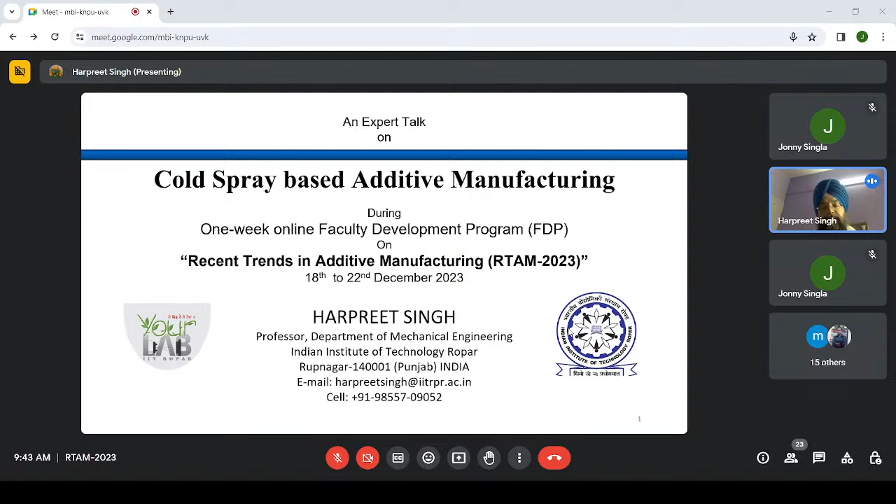let me start. Now, this is the first slide, which is about my group. My group has several students, as in the introduction. Almost 20 to 23 students have already passed their PhD from this group, in our lab, and several more are doing their research work. So why I'm here is basically due to my research scholars, my students, who have been helping me to understand this

to greater depth, because I completed my PhD in 2005, and after that my role is more like a manager, to manage funding and kind of mentor the students. But the actual work is done by these PhD students, master students, and so on. So I owe all this credit to them, my students.

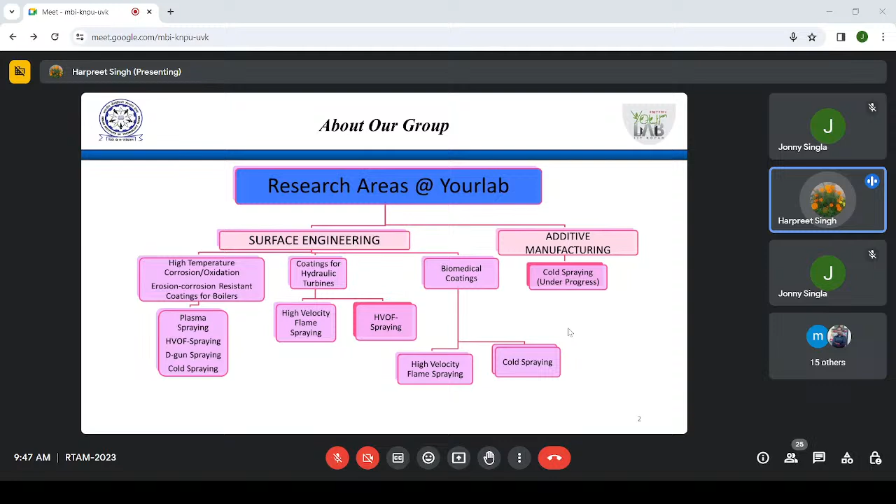Now, another aspect which we have started very recently, I will say, is additive manufacturing. Now, again, here our emphasis is not on selective laser sintering or melting or those kinds of processes. Rather, as I told you earlier, we are trying to explore cold spray capabilities for additive manufacturing. Why? We'll understand why it is an attractive option to us as we progress through this. This is a little bit about what kind of research we are doing in our lab.

Now, since I use this word thermal spray, what is thermal spray basically? Thermal spray is basically a process to develop coatings, right? So we want to develop some coatings on some substrates. What will be the feedstock? Feedstock could be powder, or it could be wire also. Now the idea here is that we melt the powder. Typically, we used to melt the powder or the wire, and then propel it with certain velocity towards the substrate. Substrate is the substance where we want to develop the coating.

So suppose I want to develop a coating on this surface. I will heat the materials or sometimes melt the materials. Then those materials will be pushed with high velocity towards the substrate, where they will stick on the surface. Now, this is basically a TV process. Thermal spray coating is basically a TV process, meaning a temperature and velocity process. So we heat the materials, we propel them, meaning we give them some velocity, and then we allow them to solidify very quickly on the surface, which we call the substrate.

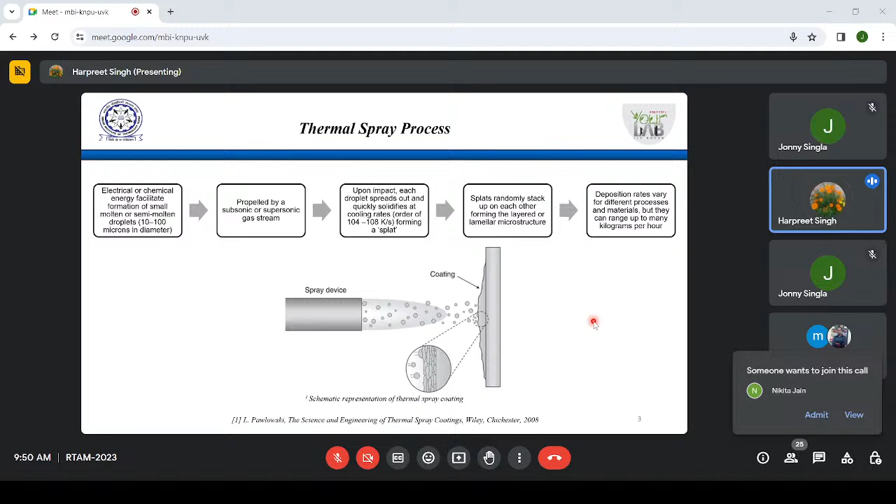So from there he got this idea, he started his work, and he developed some of these initial variants of thermal spray, which were more electric energy based, and then later on flame also came into the picture. So see, when I say temperature, how will it come? It can come from some fuel, or maybe from electric energy and so on. So that is where people started using these options. Wherever we were using flame, we call it flame spraying based processes. Wherever we are using the electric arc, these are basically based on electric energy, so we use the word arc and so on.

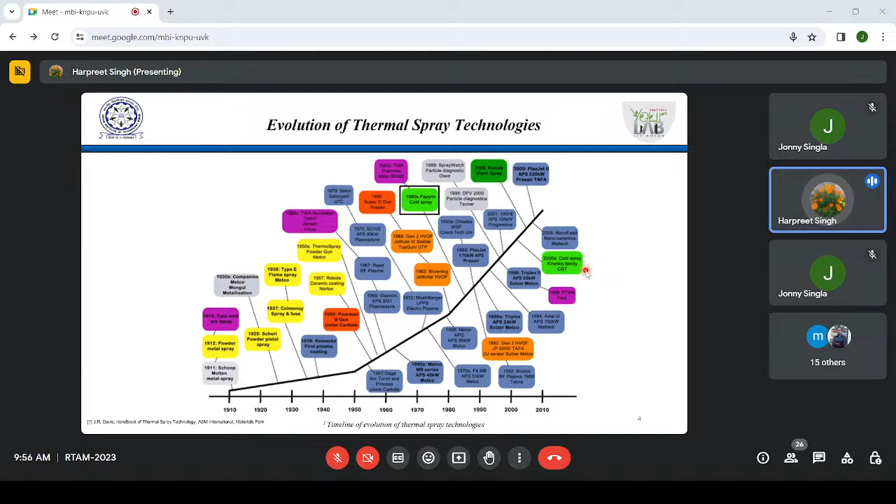So as I told you, we do not appreciate high temperature much in any process, because this leads to phase transformations or material oxidation, right? The most frequently used feedstock in thermal spray is powder, and powders are very active, so they get degraded when temperatures are high. That is something we want to avoid. So that's why we started thinking of lowering the process temperatures, right?

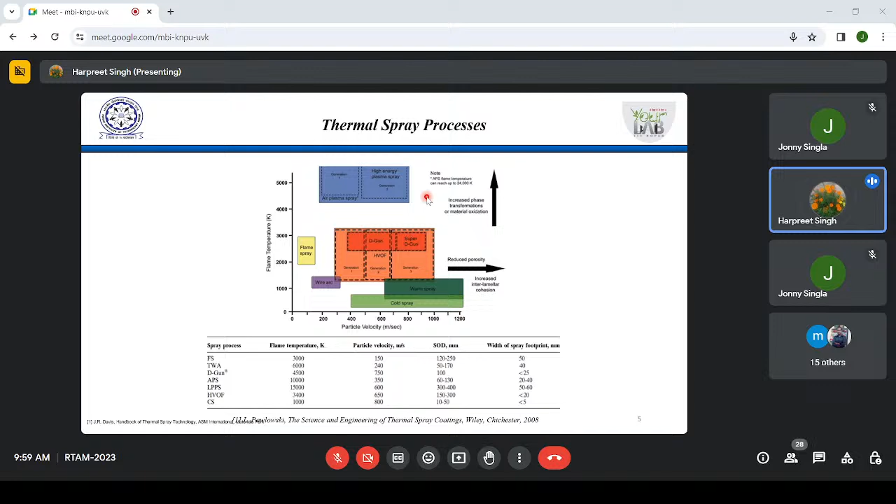Because if you see plasma or flame spray for that matter, after a typical thickness you will not be able to retain further material on those coatings, right? And you become restricted in terms of the thickness to be achieved. Basically, it is due to the inter-lamellar cohesion differential.

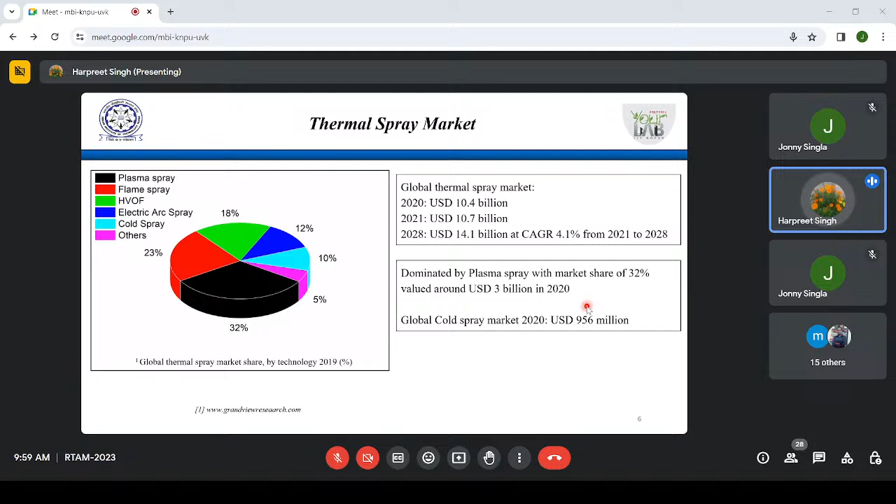So thermal spray in itself is a good market. I would say it is now a fairly popular market. You can see here plasma and all these generations of thermal spray are getting a good amount of market, and of course cold spray is picking up. Here it is 10% of the global market. These figures show that there is a demand for thermal spray technologies. Plasma spray is still enjoying a very good market share, but cold spray also has its own niche market.

So it is coming up in transportation and so on. Transportation is the biggest lever for cold spray, and by transportation I mean the aerospace and automobile sectors. There, cold spray is getting much recognition mainly because of its solid state nature, meaning the process temperature is very low and the quality of the deposits is very high. So the cold spray market definitely is picking up.

And if you see any thermal spray conference now, a lot of research emphasis is on cold spray these days, because people see its advantages in two domains. One is surface engineering, and another is additive manufacturing.

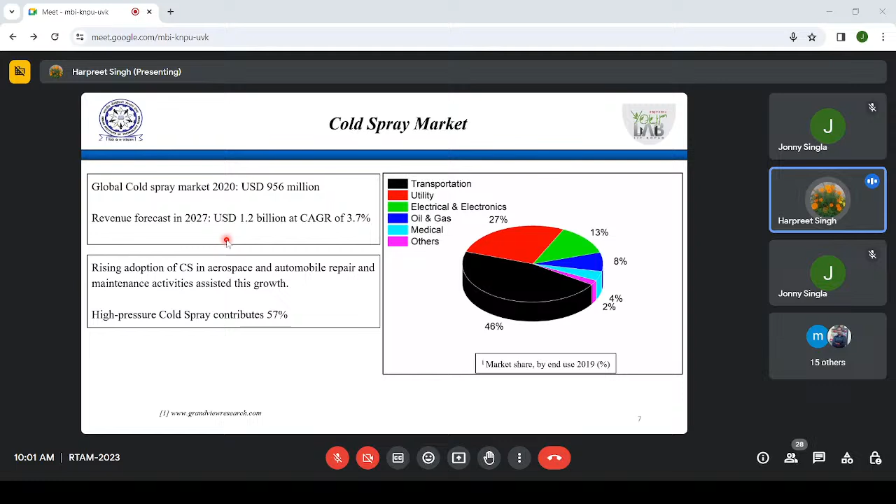Now this brings us to the cold spray process. Let us try to understand it. As I told you, we are majorly dependent upon the velocity, right? Here the velocities are very high, typically supersonic, meaning the Mach number is more than one. We are reaching Mach number 2, 3, and so on.

Now, how to do it actually? Getting a supersonic jet is not an easy job. That is done with the help of supersonic nozzles. Those who are good in thermodynamics would know that supersonic nozzles have converging and diverging sections, right?

So we have the throat here and we have this converging and diverging section. Now, the role of this nozzle is basically to achieve a supersonic jet of a gas. So we are using nitrogen, or in initial variants they were using air itself, and then helium.

So the three options are frequently used, but air is used for low pressure cold spray systems. When I say low pressure, I mean systems with less than 10 bar pressure. But if we have high pressure systems, we have to go with nitrogen. And if you want to have very high purity coating, then helium is a good choice. But everything comes with some price, and we have to have a kind of selection manual to make such decisions.

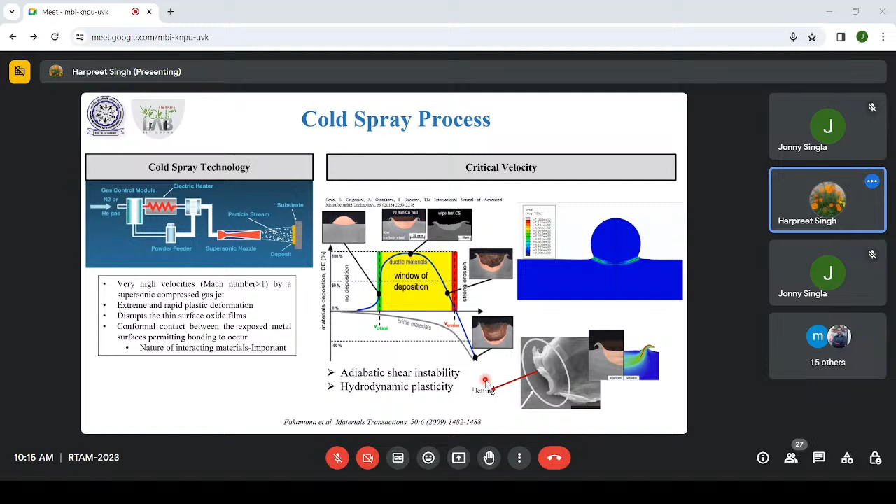Now, as in the introduction, we said that we have set up this facility at IIT Ropar also - a cold spray facility. We have this system from Plasma Giken, and this is very high pressure, I would say.

This can go up to 50 bar pressure and 1000 degrees Celsius temperature.

So since this system is creating a supersonic jet, we can partly see this gun actually. I'm sorry, I don't have the full figure of the system, but anyway, this is the gun, what we call the cold spray system.

Here we have this nozzle outlet. Now particles will be introduced from here, and gas and everything will come from outside. Now everything is done in an acoustic chamber.

Why? We can well imagine that we have this supersonic jet of gas which will create a lot of noise. So we have this acoustic chamber and so on. Here we fix the part, the sample on which we want to develop the coating.

And let me show you this video. You will see material coming out from this nozzle. The point here is that in cold spray you don't even see this jet actually, because there's nothing burning, there's no flame per se.

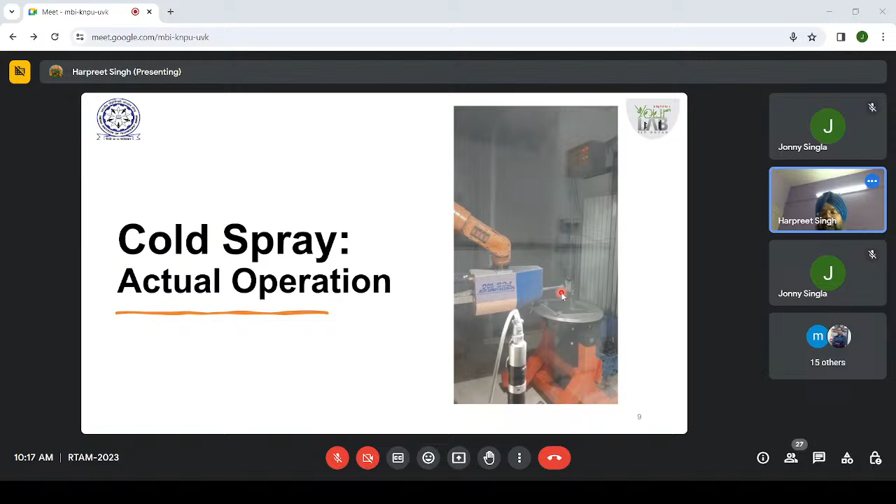So you can move the gun, and we are getting the thing on. You can see the stream coming out of it.

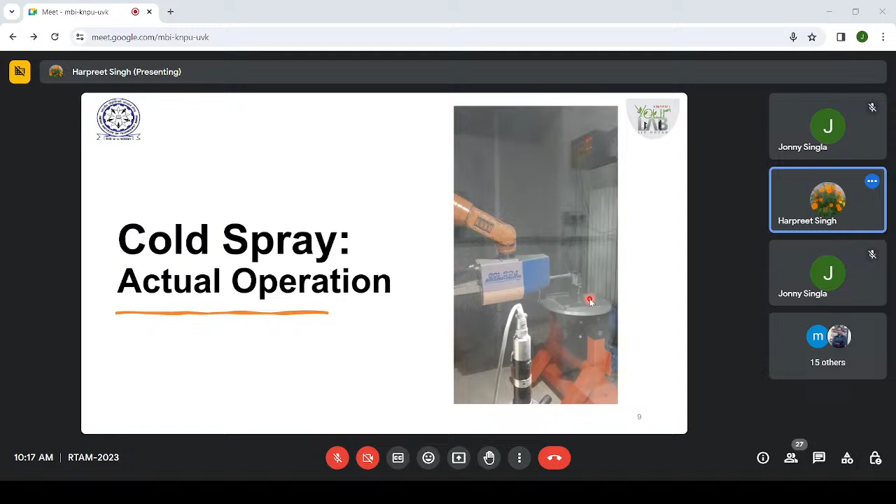You can see the deposition is right on the target.

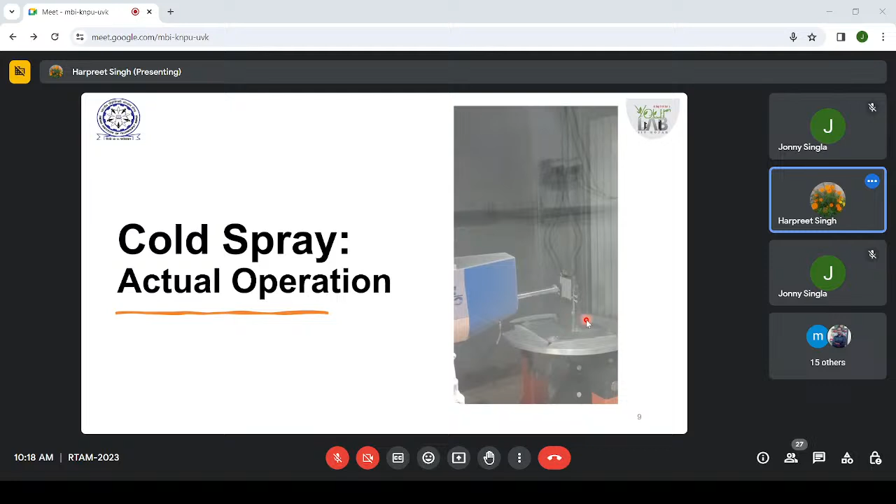Okay, so now, from a scientific point of view, this particle impact basically will depend upon particle velocity and particle temperature.

Now, how is particle velocity controlled in cold spray? That will depend upon the stagnation pressure - meaning the temperature and pressure at which you are giving the gas to the nozzle.

Process temperature also matters, because as I told you, lighter the gas, more will be the particle velocity.

I mean, more the temperature, more will be the velocity of the gas, and hence the particle velocity. And the nozzle dimensions, type of carrier gas - helium, nitrogen - among these, you can get very high velocities through helium.

Nitrogen is kind of a trade-off between air and helium. The problem with helium is, although you will get very high quality coatings, it's very costly.

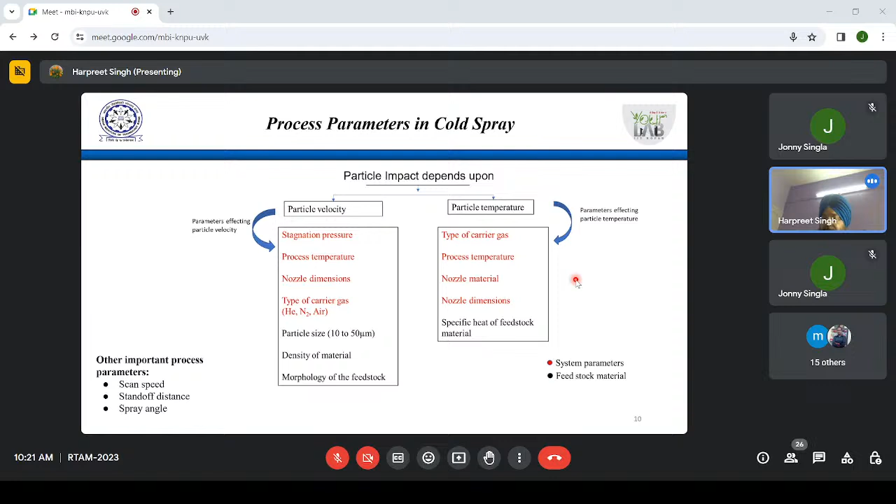So these are all process parameters which one should look into while developing the coating.

Now the question is, why is cold spray being used or becoming popular for surface engineering as well as additive manufacturing.

So one is that no melting of powder takes place here, right? That means the chances of oxide formation, etc. will be reduced, especially when we have low melting temperature materials like aluminum, etc. So this gives us an added advantage, right?

And plastically deforming the feedstock powder will improve the mechanical properties. It has been seen that since you are doing severe plastic deformation of the particles, their grain size also improves, in the sense that it becomes refined and you get very good mechanical properties in the deposits, which is another very attractive point.

Coating thickness, yes, as I told you, we have very good adhesion or cohesive strength between the layers. So you can use it for additive manufacturing as well, and as well repair. Repair is also kind of a domain in manufacturing itself, done just like as we do additive manufacturing, right? So repair means typically here again we need to have some kind of thick deposits or deposits of high quality and so on. I'll show you some examples.

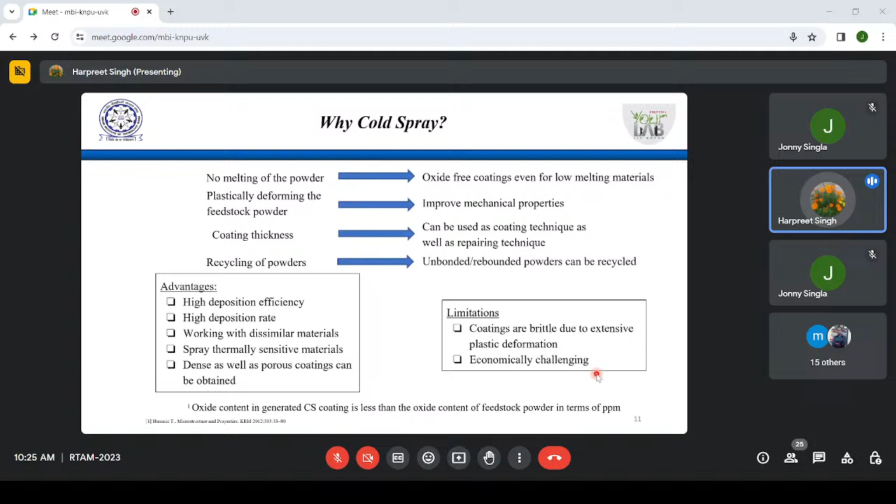Limitations are basically two. Coatings are brittle due to extensive plastic deformation, right? So they become very brittle. That means you have to sometimes do some kind of post treatment to remove that brittleness, right? And economically, it is challenging, of course, because of the higher volume usage of the process gas. For example, nitrogen will be used in our system, right? So that becomes challenging. Of course, people are trying to recycle this gas also. Probably in the future we'll get some good economics in this aspect also. But this brittleness thing, in certain applications, it's fine to have brittle, no problem. But in certain other cases, you have to have some kind of heat treatment to reduce this brittleness in the deposits.

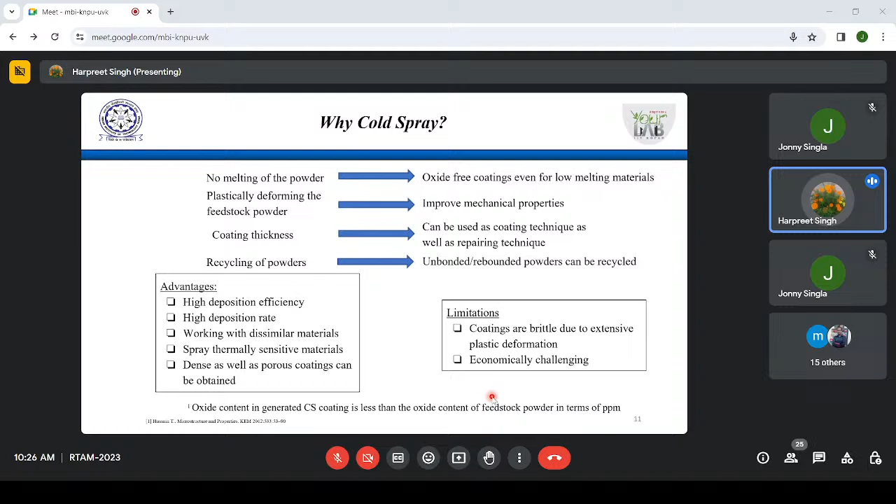Here's another very interesting observation: the oxide content in the generated cold spray coatings is less than the oxide content of the feed powder in terms of ppm. What does it mean? Whenever you get some feedstock powder, it will have some kind of oxide content, because these powders are very active, so you get some kind of oxide layer on the powder particles. Now what has been seen in the cold spray deposits is that oxide content has even reduced, which is interesting, right? Instead of having oxidation, we are getting reduced oxidation. This observation basically comes from the fact that when particles are going, suppose there is a particle which has some oxide layer. Oxide layer is usually very brittle, so as soon as it strikes the surface, that oxide layer disrupts, goes away, flakes away, and you get adhesion. So that is something interesting which has been seen in some of the studies.

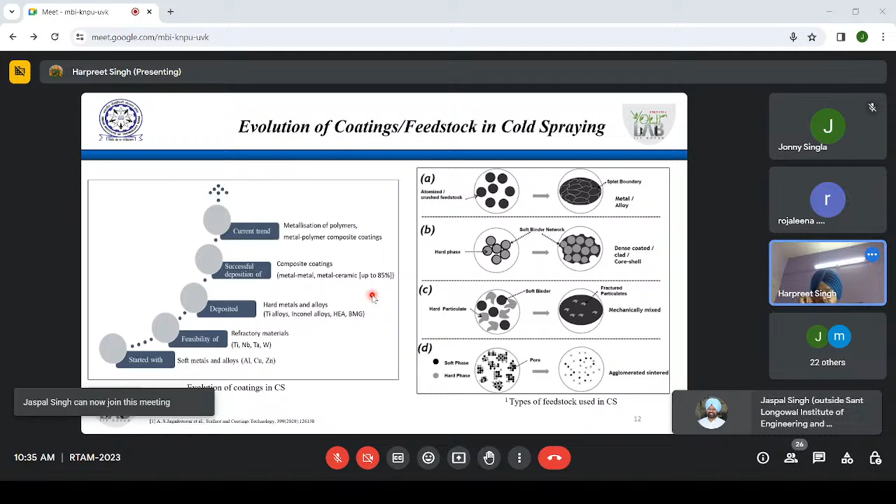Well, as I told you, if there are some challenges in terms of getting the desired properties, people have done some interesting work in terms of post processing of these deposits also. One approach would be that we go with heat treatment, right? So heat treatment, we all know that it can mitigate the porosity, it can improve the intersplat bonding, just like in your sintering. This, for example, is an as-coated substrate, right? So this is the coating.

In the coating, you will see very clearly the splat boundaries. But once you heat treat, these splat boundaries can be merged and you can get better intersplat bonding, right? So this approach is being used, but there is some other interesting work people have done. Some people are doing stress relaxation by post deposition shot peening also, right? Then laser assisted cold spray is also being tried, right, to get the desired ductility in the materials.

In situ hammering is another interesting application where people are using slightly bigger hard particles, which are just giving the hammering effect, and they're not getting deposited. Rather, they'll come, they'll hammer. It's like in situ peening kind of thing, right? So this hammering will increase the adhesion between the layers, right? Cohesion is improved by this, but then they'll rebound and they'll go back, right?

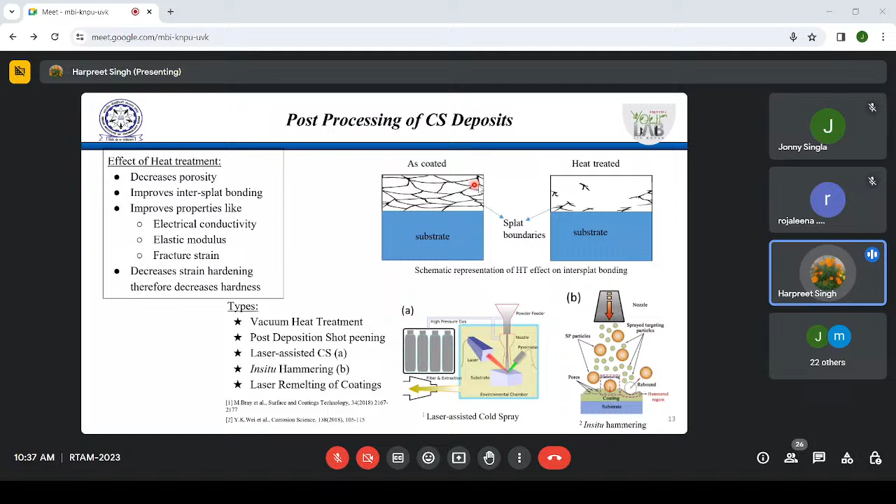So then another question which is very practical actually. As I told you, whenever you have a new combination of materials, meaning the feedstock material and the substrate, there is still a lot of discussion about what kind of surface roughness the substrate should have, because surface roughness will definitely affect the properties or the adhesion, and it's quite challenging in several combinations. Our practice shows that the deposition of the first layer is very, very challenging, right?

See, in thermal spray and other processes where mechanical keying is the main mechanism of bonding, there is no contradiction. People say, okay, bring some kind of hard surface roughness on the surface. It will help us to pin the particles on the surface. But in cold spray, this is not working. We have seen that there are certain combinations where the surface roughness is helping, and some combinations where it is not helping at all.

For example, this is a very good study done by my student Surinder Singh on the surface roughness effect. Here we had this combination of SS316L steel and copper, right? This is a very new application which we explored for nuclear reactors. They wanted to develop very thick coatings of 3 mm on the stainless steel. This is very challenging because they wanted pure copper coatings without any oxidation.

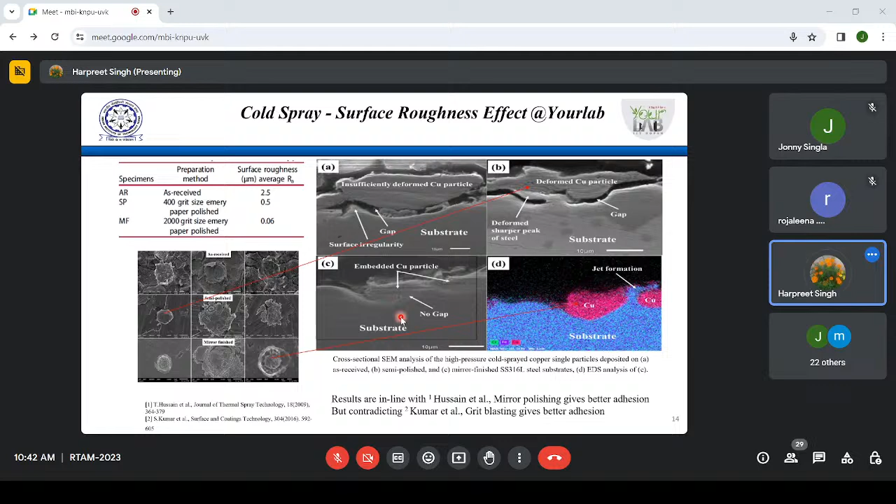So probably where we have a hard surface and a slightly ductile coating material, the surface roughness is helping. But in these kinds of cases, mirror polish will help us. The lesson from here is that we still don't have any recipe for unknown material. If you come to me with some unknown material combination to deposit, we have to do some experimentation based on surface roughness also, because we don't have a sure recipe for surface roughness.

Now then come some of the applications. We have seen most of the fundamental things, but then the capabilities. I'm showing you some of the case studies here, again done here. This is a nickel chromium based coating. Here we have added 24, 25, 26% titanium carbide in these coatings. These are composite coatings basically, which we developed very nicely, and they were giving us very good erosion corrosion resistance. Very good in fact. These additions were helping us to get better and better properties.

So this is the coating thickness. This is an experiment done in the actual boiler. You can see uncoated was showing a lot of thickness loss, but this thickness loss was reduced after our compositions. These are all developed by cold spray, and you can see the structure of these coatings. Nicely adhered coatings, nice distribution of several elements, and oxygen was weak around.

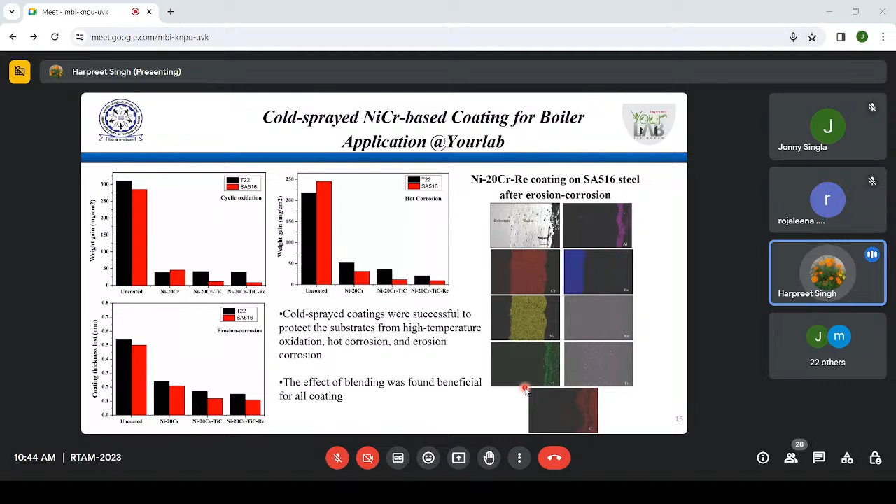Then this is another set of nanostructured coatings which we again developed at IIT Ropar itself. So again we could develop very nice coatings with nanostructures, and erosion corrosion was further decreased. This is a conventional coating which was developed by Neerjwala, but then Manoj did some nanostructure work, and he could further improve the erosion corrosion resistance.

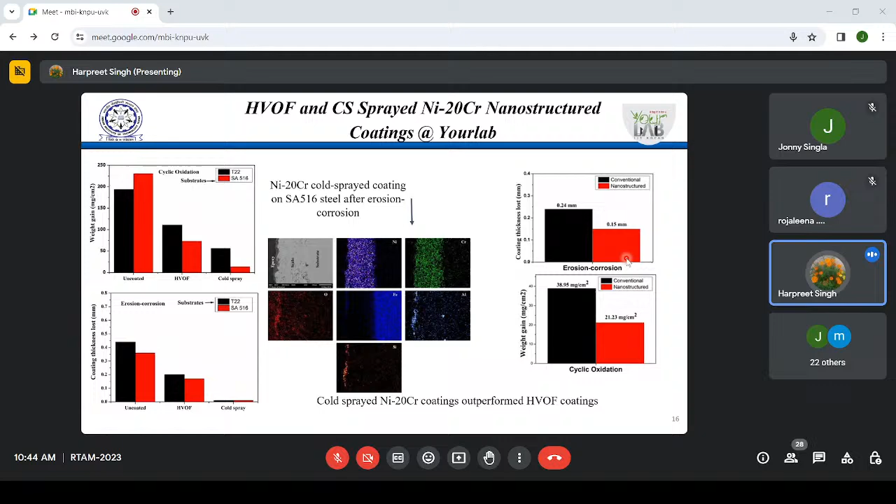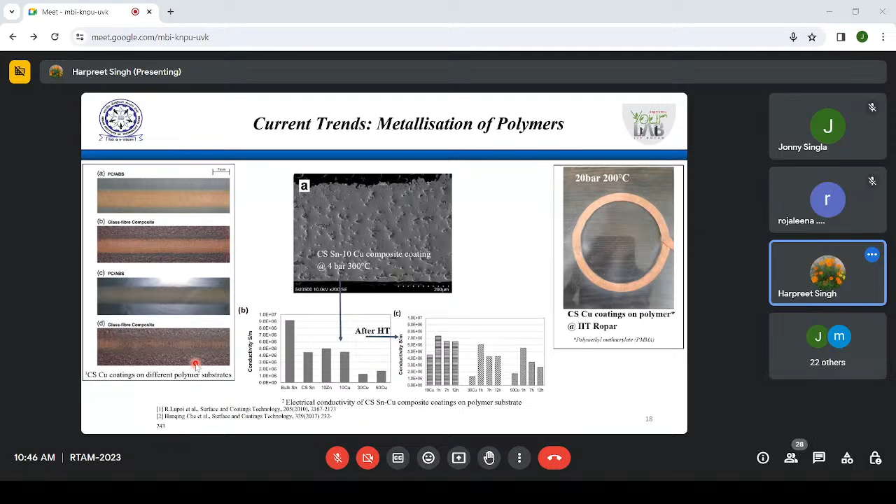So this is about metallization of polymers. You can see some polymer coatings have been deposited. These are glass fiber composite, PC, ABS, and we also do copper coating on PMMA substrate at IIT Ropar. This pure copper coating could be deposited on this PMMA sheet and so on. Copper coatings on different polymer substrates have been produced. These all have nice applications in several domains.

Bond coats for TBCs. This is of interest to the aerospace industry. Those who are aware of thermal barrier coatings know they are usually provided on turbine blades, but the problem is that TBCs are mostly ceramic, and the substrate is some alloy, so there is a lot of CTE mismatch. What is CTE? It's coefficient of thermal expansion mismatch. That is compensated with the help of these bond coats.

But the bond coats produce their own challenges in terms of oxidation and so on. So there is a lot of research going on in that domain, and people are trying to develop better and better bond coats. And some studies have shown that bond coats by cold spray can be very interesting.

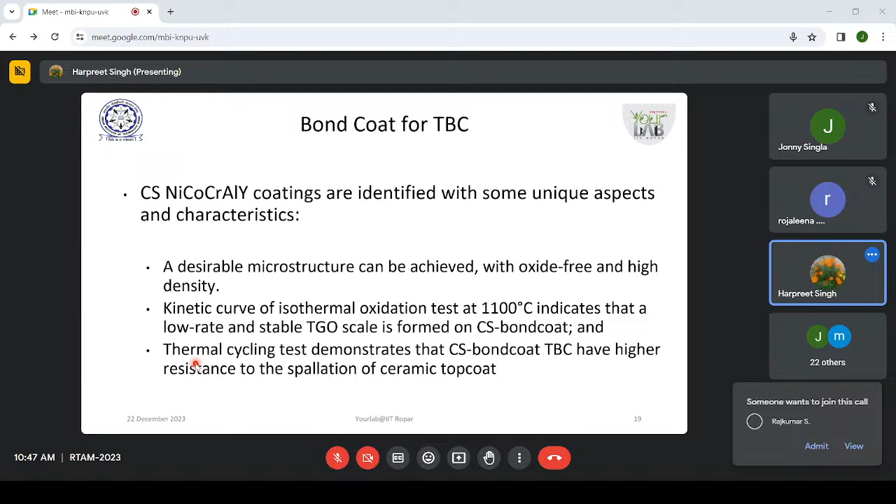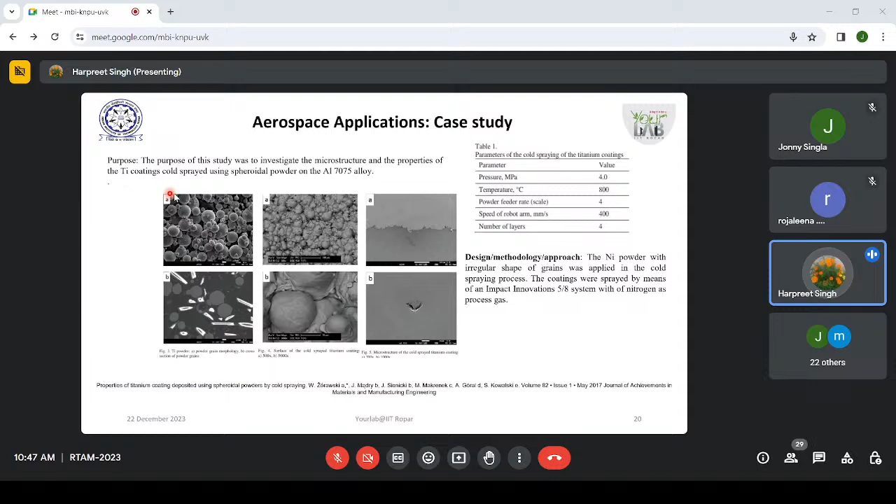These are further applications of other coatings. So these are titanium coatings, cold sprayed coatings, so dense coatings, having very nice properties. Biomedical application, again, a very promising area in terms of even commercialization also. A lot of research is needed in this direction.

And the biomedical coating is one where we are looking for certain porosity. Actually, it's the other way, right? If we talk about most of the applications, we are not wanting to have porosity. But in biomedical applications, we are interested to have some porosity. Rather, if it can be interconnected, it will be very good, because then it will help us to have cell growth and whatever they call it, to be very intact, right?

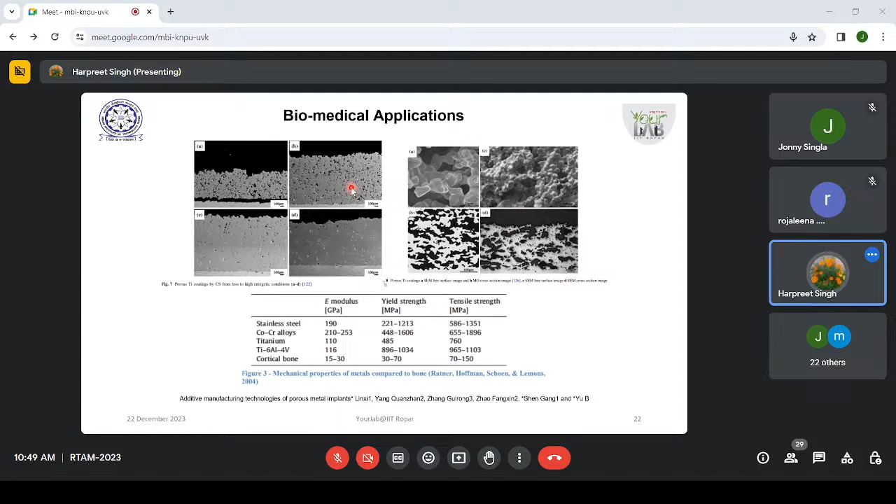Of course, we have not done it at IIT Ropar, but these are case studies from the literature. So you can see these nice coating structures. These are biomedical coatings we developed at IIT Ropar. Here the purpose was to bring some kind of wear resistance and corrosion resistance, and we developed these composite coatings where we introduced this ceramic baghdadite. Baghdadite is basically a new material which is seen as a replacement to HAP, which is traditionally used.

Now HAP, although it's an excellent material, has a lesser mechanical strength. So when we are talking about sliding contacts, or wherever in the implants there are chances of wear, there baghdadite has better properties because it has some zirconium. Of course, it's again a calcium derivative, but it has some zirconium which gives us better hardness or mechanical properties and so on. So we did this. Avnish Kumar has done this research very recently. He's completed his PhD. So many other materials have been tried by cold spray.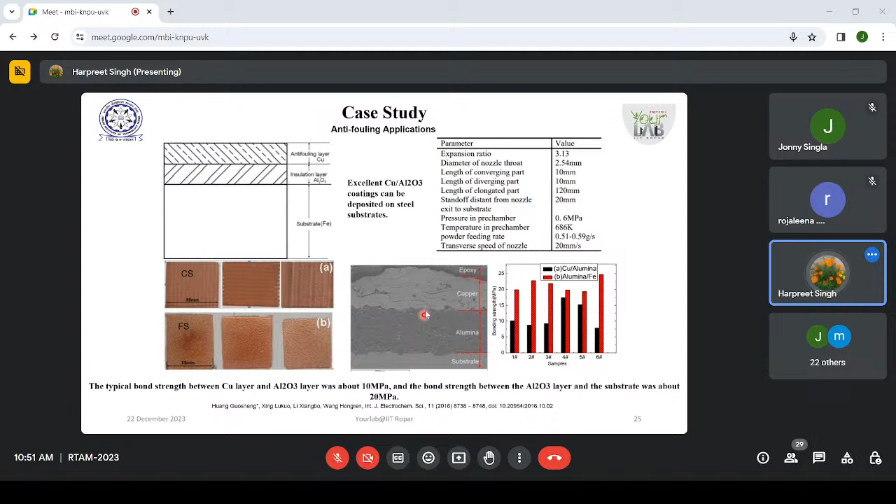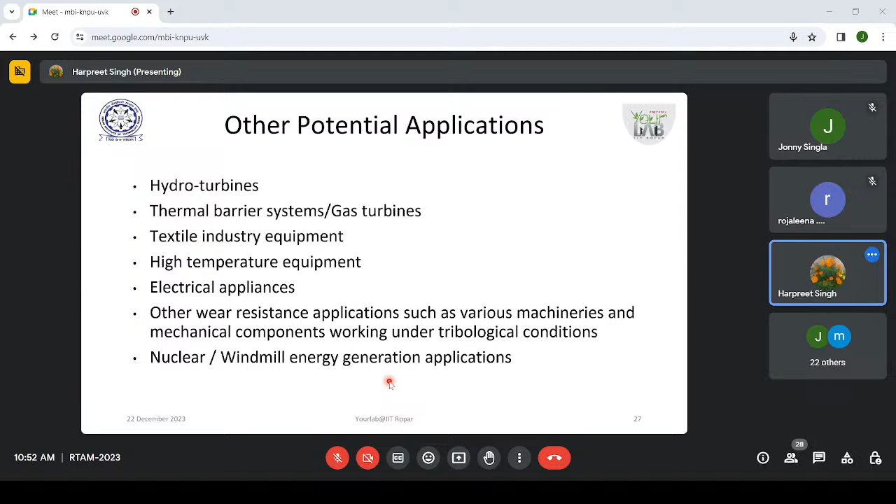Well, in the coating area, we can have other potential areas where those who want to work should explore all this equipment and these new applications, because cold spray needs to be looked at for several other applications. It's up to you how you guys can think over and explore its application. There's a wide scope in the cold spray area where you can do some novel work and get good publications and maybe commercialization also and so on.

Then let me spend some more time on this. Of course, by now you get some understanding of how cold spray can be a good option for additive manufacturing. But I want to put it here more systematically. One thing is clear, that cold spray can be used as an additive manufacturing process, but then how is it standing against the other processes like laser sintering, powder cladding, wire cladding, E-beam, and so on?

So cold spray is here actually. This is cold gas dynamic manufacturing, and this is also cold spray, right? So in general cold spray can be put here. Now what this graph shows: cold spray can give you very good deposition rates, but in case of shaping fidelity, we are low. What does that mean? It means that for very complex shapes, cold spray has a limitation. After all, we are exploiting the relative movement between the target and the cold spray, which is restricted, of course.

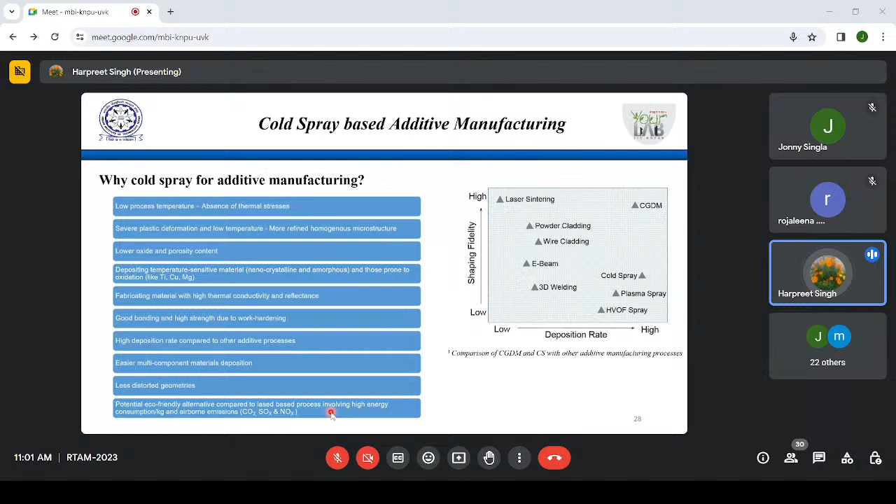Less distorted geometries. Of course, because we are not having these temperatures, you don't have warping and other things which can happen in other processes. Potentially eco-friendly alternative compared to laser-based processes involving high energy consumption and so on. Because temperature is not involved, and we all should be sensitive to our environment. I usually say to all my students that whenever you do some research or develop some technology, always think about the eco aspect, right? It's very, very important. It's high time that we don't create any more nuisance to the environment.

So we are now coming on to some additive manufacturing applications where cold spray has been used, right? So I'm showing you some of the very practical applications. This is a freestanding bi-material, hollow-shaped permanent magnet fabricated from this material. This is some composite material and pure iron using cold spray additive. This kind of material components have been manufactured.

This is a multi-layered titanium copper object, and it's cut by this. This is its cross section. So this is a multi-component material. Again, if you do these kind of things by laser, of course you can do it, but then there will be a problem at the interface of titanium and copper, because copper will also react. There can be some kind of chemical interaction or diffusion at this intersection, right? But here, those chances are very, very meager actually.

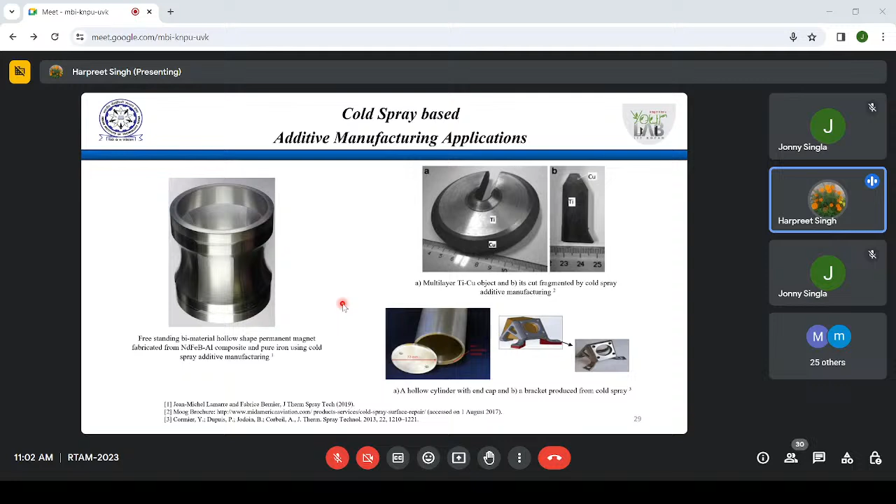So this is a hollow cylinder with end cap and a bracket produced from cold spray, right? These are all metal components which have been made. This is another interesting application. So here we have the inner wall of a pressure ring for a food processing machine. This whole thing has been made with a small-sized cold spray nozzle. This is an inner wall of a small-space cylinder tube, right? So this is one. This is an aluminum alloy tube. You can see aluminum flange, copper cuboid.

This is a very, very interesting application. This is a rocket nozzle by Impact Innovations. Impact India also wants to make this. This is traditionally made by some other processes, which takes several months actually. But by cold spray, it has been made in less than 30 days. I was seeing some video. I suggest you see it. This is available in the open domain. You can see that these Impact Innovations guys have made this by cold spray.

This is another CSAM copper flange, right? One caution I want to give here is that these products right now are very high-end products actually. These are not for common use. If you say I want to make this flange for my home centrifugal pump and so on, I will not recommend it because already we have a very simple cast thing, right? But maybe in space exploration or in the transportation sector, where there is a threat to human lives and where you can't afford to have defects in the parts, there you will be thinking about these kind of investments.

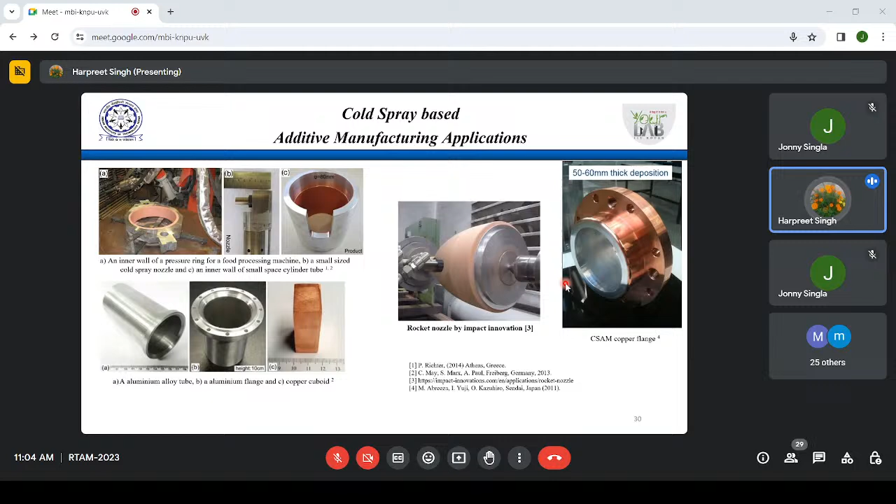This is another, repair. I was telling you about the cold spray additive repair applications. So these are all parts which are aerospace parts or costly parts. This is the front frame of T-700. Now, during usage, they will get wear and tear, right? So these kinds of damages will happen, and cold spray is a process which can help you. This is before, this is after. So you can see how these parts have been refurbished with cold spray.

Now, why cold spray? Because by now we understand that whatever deposit I make here will have almost the similar chemistry of the base, right? Whereas if you repair it by, say, welding or some other process, there will be a deviation in the properties, which is not good actually, because we will be having a different type of deposit. Slight differences will also cause some kind of problems in terms of, say, corrosion, fatigue, and so on. Right. So those things can be avoided.

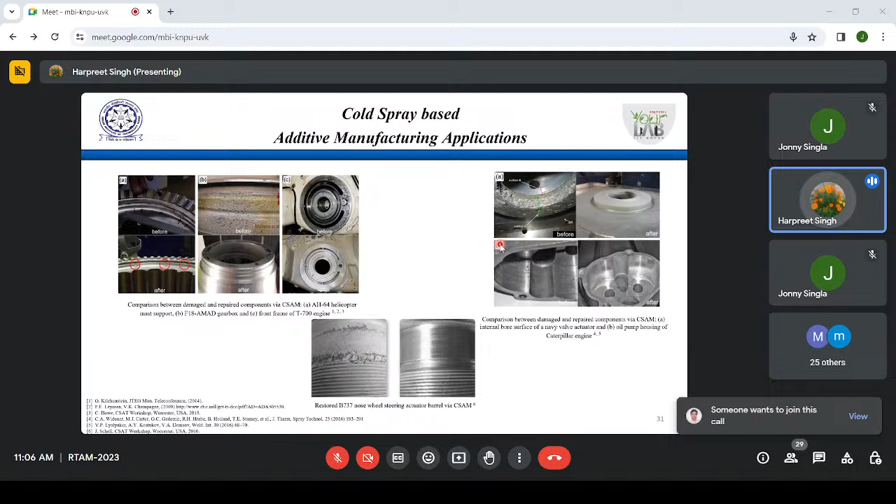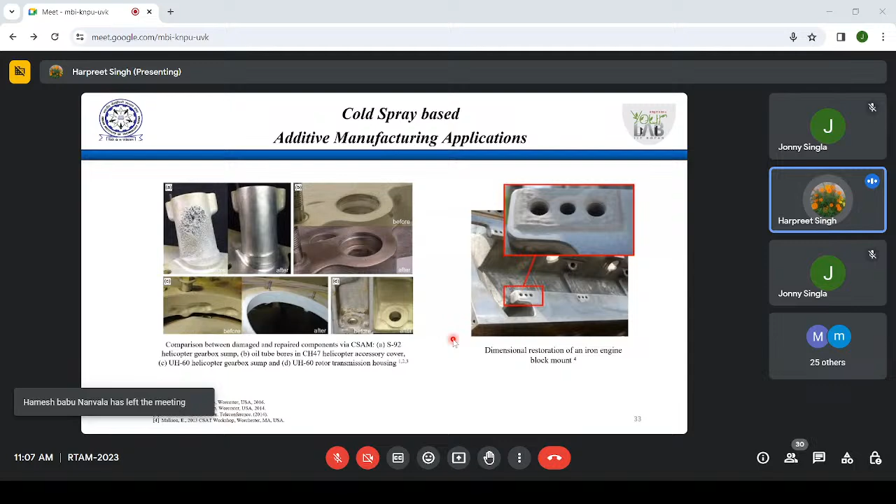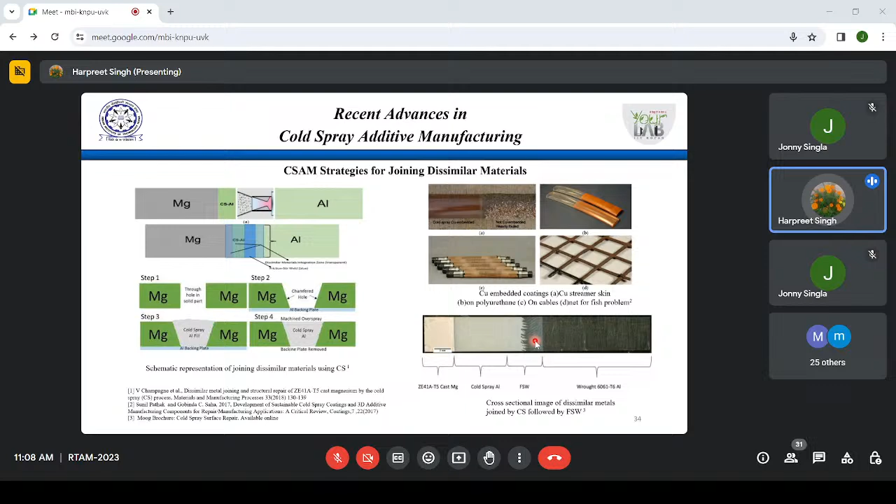This is another very interesting study from 2023 itself. People are saying, even we were saying, that there is a ductility loss in CSAM deposits, but somehow this group has developed this 50 mm thick copper coating on aluminium. It's like 5 centimeters. So when in our manufacturing, once this is more than... this becomes like a sheet, I mean thick, like a plate.

Once we are beyond 4 or 5 mm, or 6 mm, we call it a plate in our normal manufacturing. From those plates we make so many parts. These are some of the parameters which we have used. No post-processing has been done, but still they are getting 43% elongation to failure. They get this kind of bimodal grain structures, so nanocrystalline grains have been seen, which help in relieving the strain induced during impact. This could be interesting. I have not read this whole paper, but it should be studied. They have compared it with some other processes as well.

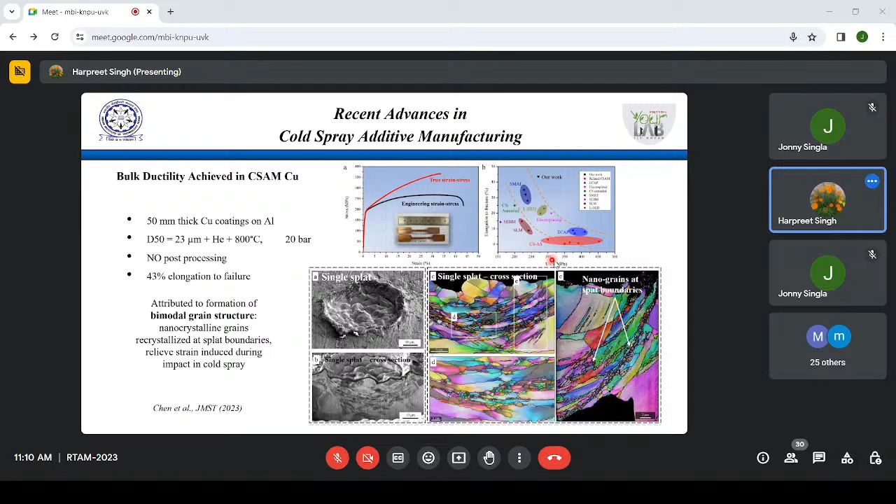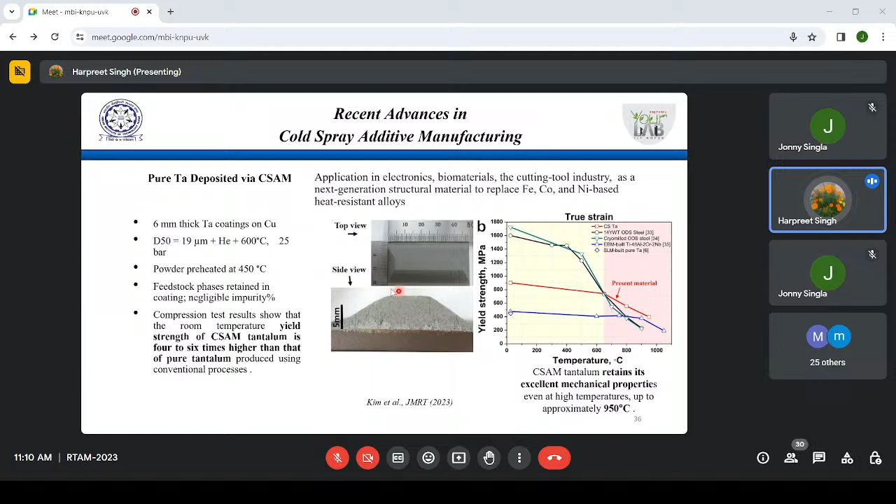Pure tantalum deposited via CSAM. Again, 6 mm thick tantalum coating on copper has been produced. Tantalum has applications in electronics, biomaterials, cutting tool industry. So a lot of applications can be explored in that domain.

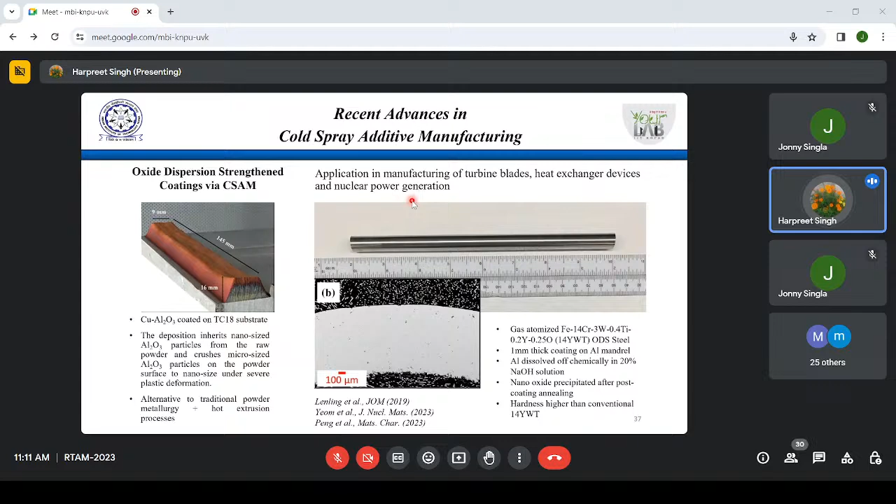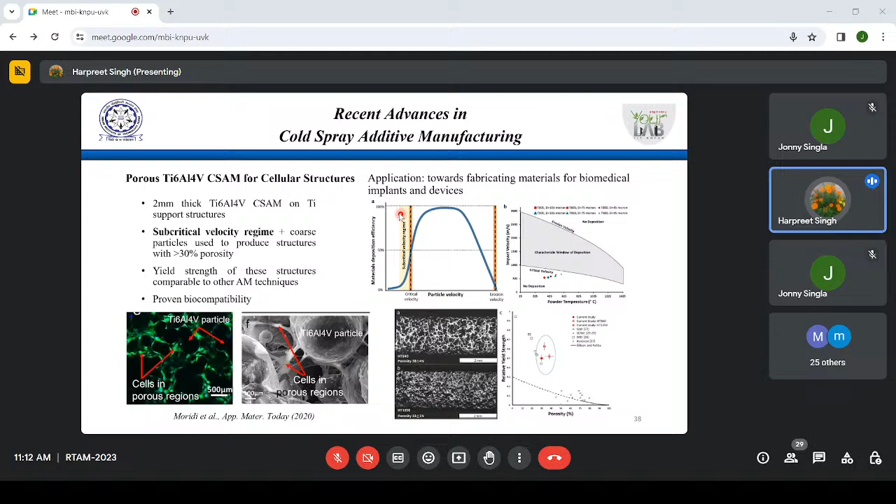So this kind of functionally graded approach has been very successful and considered for several applications. Now these technologies like additive manufacturing, both conventional and non-conventional, give us flexibility in tailoring the materials as per our requirements at the required locations. This brings definitely a lot of advantages in terms of weight and material cost.

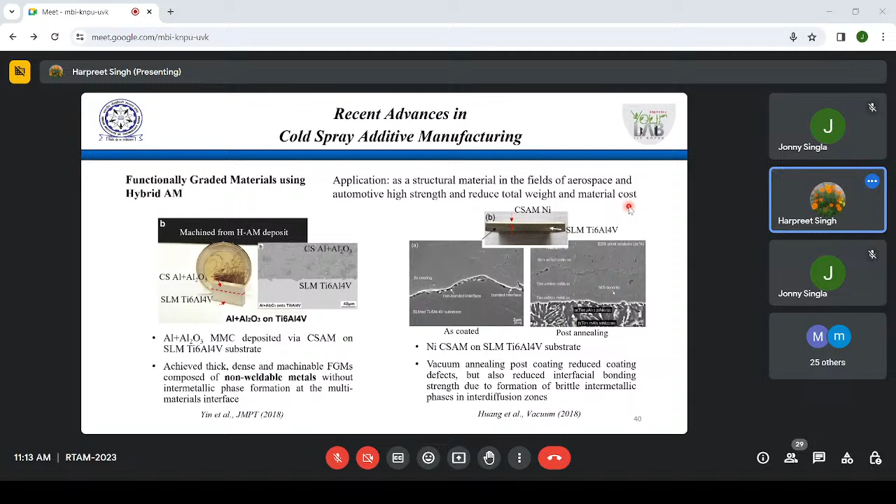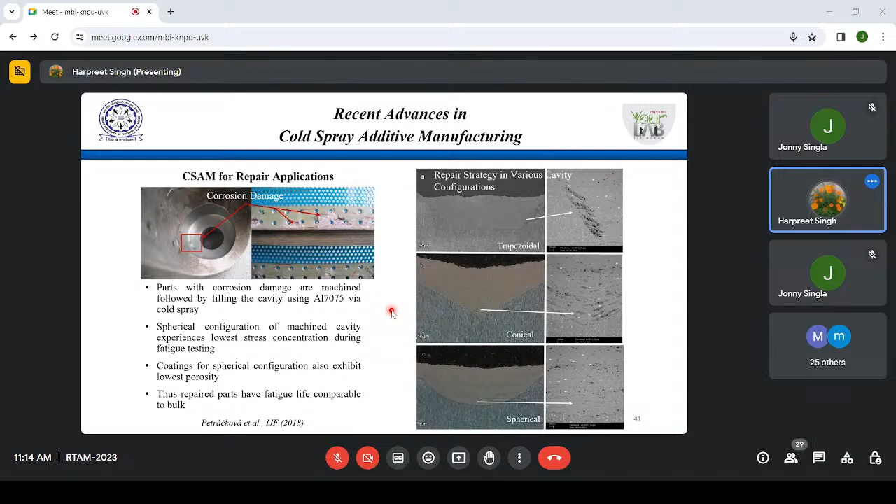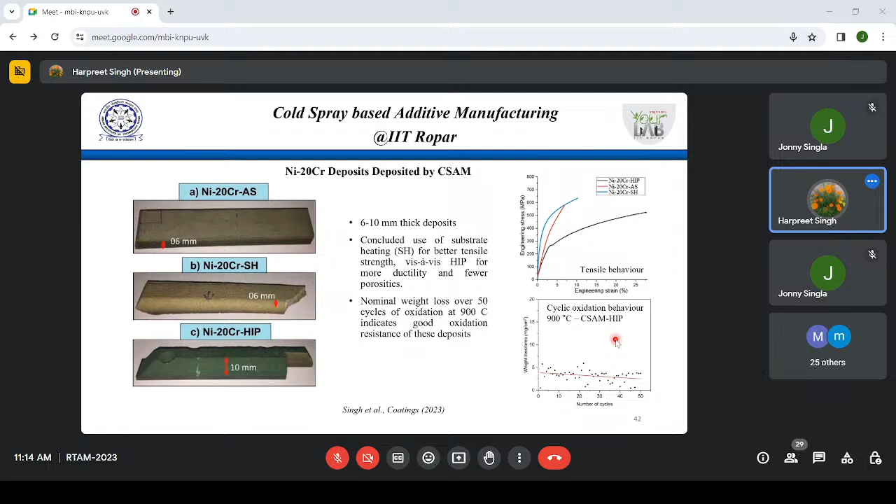Then we characterized them with regard to their mechanical properties as well as corrosion properties. The conclusion here was, if I was to tell you, that we could deposit very thick titanium as well as nickel chromium, one aspect of it.

Another thing was that the properties of these thick layers were compared with their as-cast conventional counterparts. For example, this titanium deposit's properties were compared with the as-cast titanium, and you will be surprised that we were having certain better properties in terms of mechanical properties, again owing to those severe plastic deformation effects and so on. For example, modulus was better here and so on.

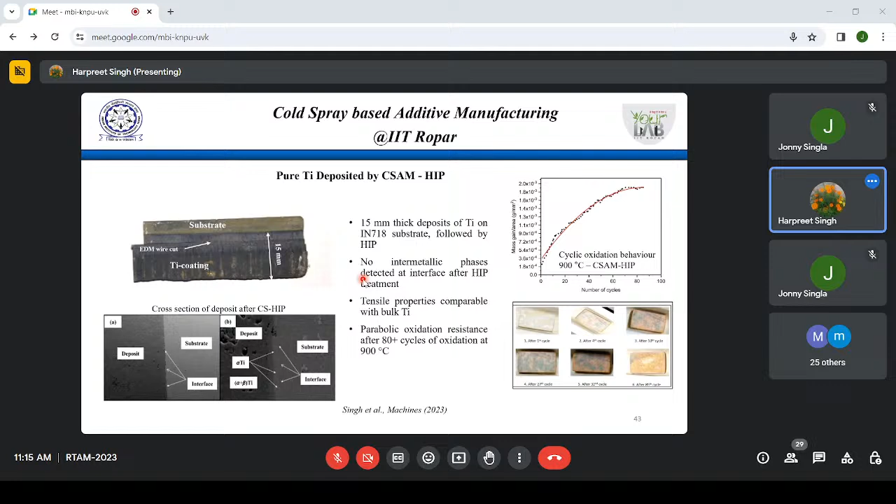But of course at the loss of ductility, and that's why you have to sometimes go with heat treatment and so on. I'm just now trying to finish this talk, complete this. But one aspect which I want to tell you all is...

As I indicated earlier also, those who want to work good in this modeling work and simulation work, there's a lot of scope actually for those people also. And if you see the publications, people are encouraging, a lot of efforts are being done mainly to understand this process by these simulations.

It may be based on molecular dynamics, it may be on computational fluid dynamics and so on. Different approaches have been used. So still there is a need to understand bonding mechanisms, nozzle, and other aspects of cold spray.

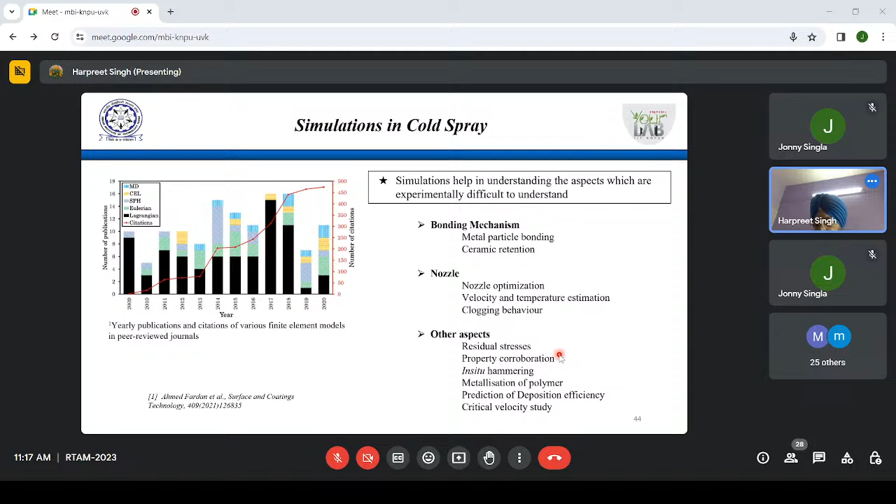These are helpful, and in my opinion, they will help us on one side to understand the process. On the other side, they will give us the economical use of cold spray also.

For example, as I told you in the beginning itself, it sometimes becomes very difficult whenever I get a new combination of materials to be deposited or to be processed through cold spray. The challenge becomes at what parameters we should start, right?

And if I go randomly, I will be spending a lot of gas to arrive at the optimized parameters, right? So now we have some models which are very nice to predict those process windows for these unknown materials properties, right?

So that is where I would say that there is a lot to be understood through simulations also. Those who are good in this simulation and modeling etc., they can do their PhDs in these simulation aspects of cold spray also. There's a scope actually. That's what I wanted to say.

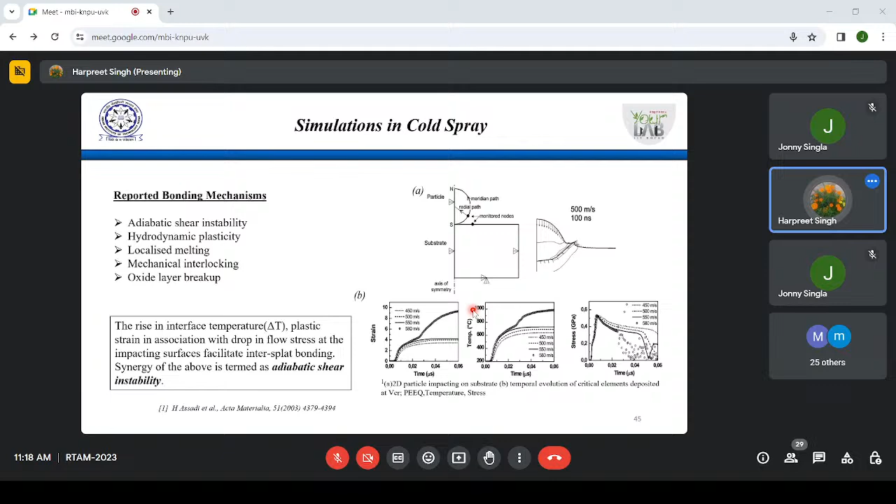Similarly, yes, this is again when we say use of cold spray for additive manufacturing. Just like in other processes, you might be listening to some other talks, even in conventional additive manufacturing processes.

The challenge is always to have this path planning, right? So same way, in cold spray, if you want to deposit some kind of complex shapes, obviously there has to be a lot done in terms of robot path planning, right?

So again, those who are good in this robot path planning etc., they can also do a very good job for making certain specific geometries economically and so on.

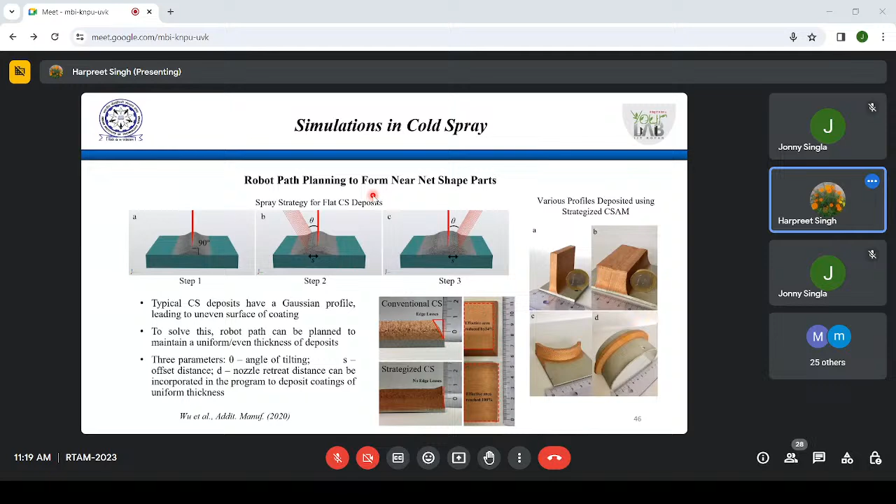Lastly, I think this is my last slide. This is what is the dream. We are talking about Industry 4.0 now. In fact, now people are talking about 5.0 also.

So the same, this Industry 4.0, our systems, thermal spraying systems, cold spray systems, they have to be compatible with that Industry 4.0 framework. So from that angle, if I see my cold spray systems, we have the spray modules. So you can have several modules in our cold spray lab or setup.

One is a robot module, there is one. One is the spray module where we have this gun and we are exploring it for gases and other things. And then we have a post-processing module where heat treatment was done, and an inter-process module where milling, blasting, drilling, etc. And we have this in-situ measurement.

Now, this is a very good kind of system, and the challenge is can we make a closed feedback system for all this.

Industry 4.0 is about connecting all these systems so that they work in an autonomous manner, not just automatic but autonomous, where we get continuous outputs on how the part is being built up. If there is some deviation in those properties, we can control the process parameters accordingly. A lot of work has been done on this, but there's still a challenge because when we deposit material, usually people say 'spray and pray' - meaning spray it and see what comes out. We are always afraid of what kind of material properties we are going to achieve while spraying.

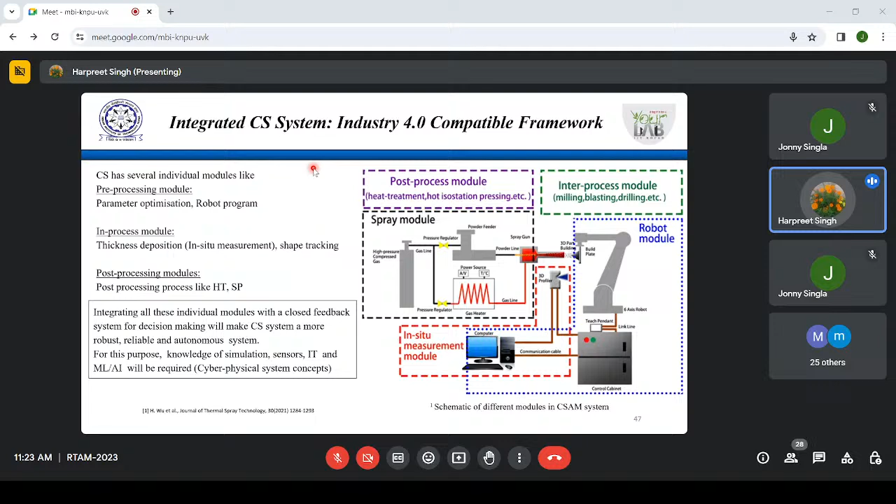So this is the setup which we have at IIT Ropar. This is the robot here, this is the gun basically, this is the powder feeder. Other things are controls, and this is an acoustic chamber and so on. Thank you very much indeed, and if there are some questions, we can always discuss.

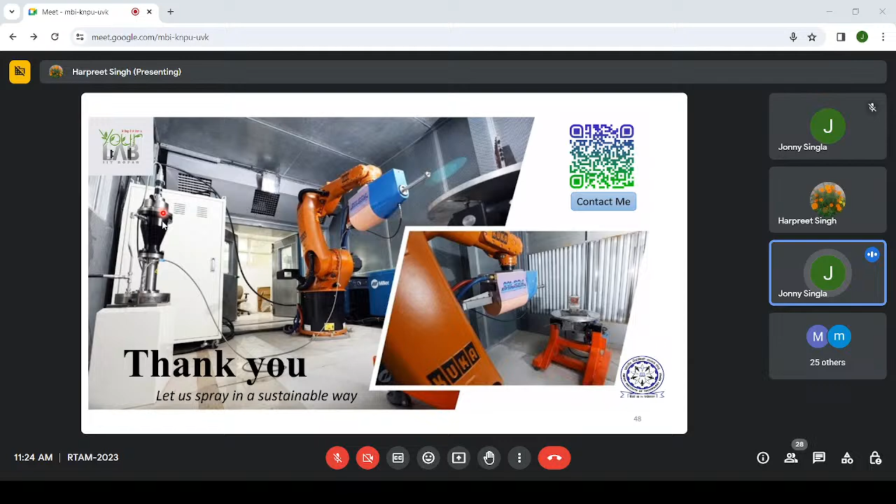Sir, if we are changing the pressure like 10 bar, 20 bar, 30 bar, 40 bar, is there any simulation we can do between these values - 20, 30, 40 - to study what is the trend in the change in deposition? Yes, we should actually do this. There's a need, and there are some models on this also, of course.

Sir, may I know a few tools which we can use for this - while changing the parameters, can we see the trend? I'm not an expert in that, but write an email to me. My student Binay is very good in that, I'll connect you with him, no problem. Right now we are using Abaqus and CFD simulations, so those can help us.

But there are some special simulation softwares also for that purpose. Two of my students are doing good work in that - one is Parminder Singh, he is now at Applied Materials, so he'll come back, I can connect you to him also, or Vinay Gitla. Not a problem, this is not a big deal, just write an email to me and I'll connect you. Thank you so much.